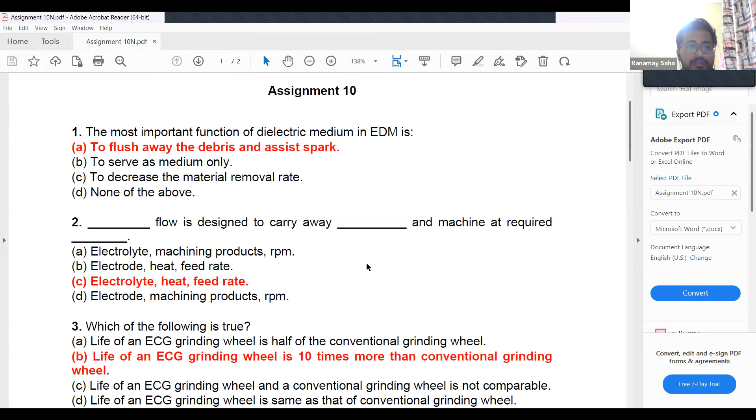Okay, so let's start with the assignment problems from last week, and then we'll continue to discuss some concepts and problems out of electrochemical machining process, which is your current week content. So starting with previous week assignment questions, you can see on the screen your previous week assignment questions. We'll first discuss these questions in some detail and get your doubts cleared if you have any. Then we'll look at concepts and problems from your current week content, that is electrochemical machining process. I hope all of you have gone through the videos of the current week, and if you have any doubts, you can shoot it anytime.

Starting with previous week assignment questions, the first question said: what is the most important function of a dielectric medium in EDM? We had discussed this in the last problem solving session. The most important function of dielectric medium is to flush away the debris, out of these four options. So taking away the debris has to be the most important function.

Then the next question said: dash flow is designed to carry away dash and machine at required dash. If you look at the options, take the first option - electrolyte is a fluid which flows, so electrode is not the one. So options B and D get cancelled instantaneously, and then you have option A and C.

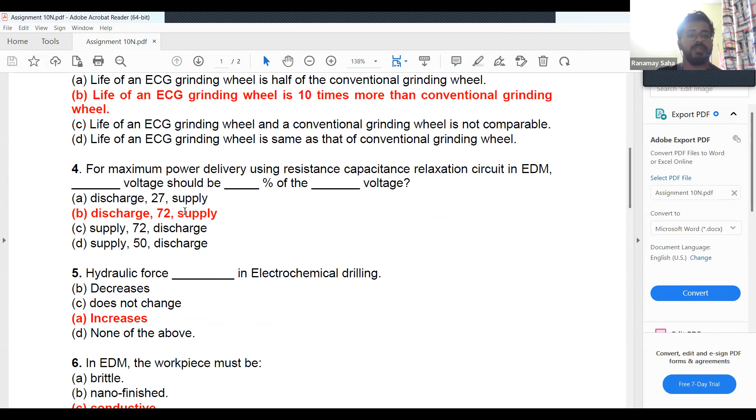Then it says that for maximum power delivery using resistance capacitance relaxation circuit in EDM - this was derived in detail, it's the discharge voltage. We had already discussed that in the previous session, and it is generally 72% of your applied voltage, or supply voltage. So option B has to be the correct one here.

And then you have hydraulic force in electrochemical drilling. With electrochemical drilling operation, in the course of the operation, hydraulic force generally increases.

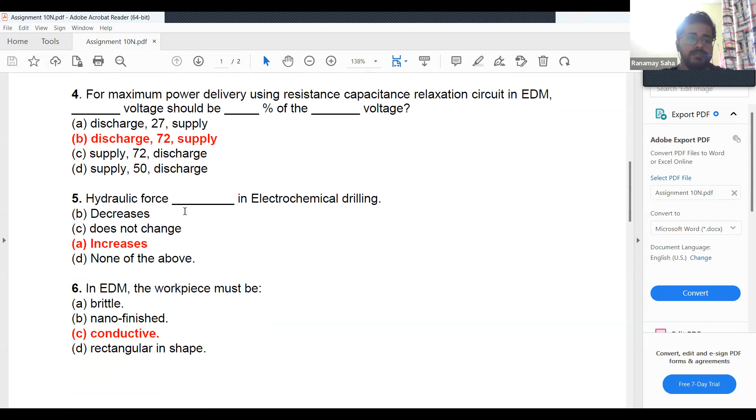Then, in EDM, the workpiece has to be conductive. Otherwise, how can electrodischarge machining take place? There will not be any flow of ions and electrons, and there will not be formation of an avalanche of ions. We discussed the basic principle of EDM last session at the very start. So the workpiece has to have conductivity for the EDM process to happen.

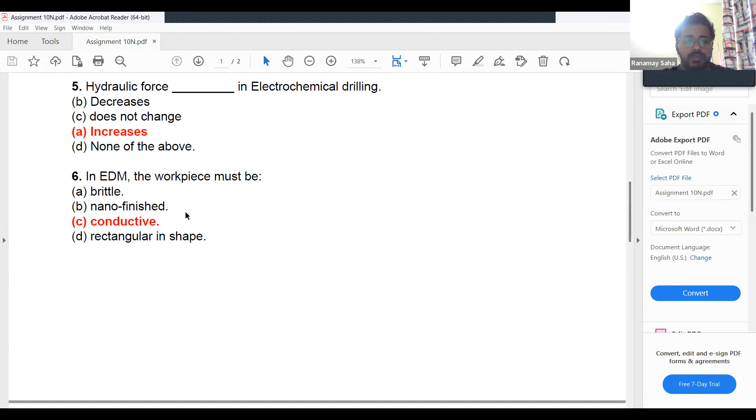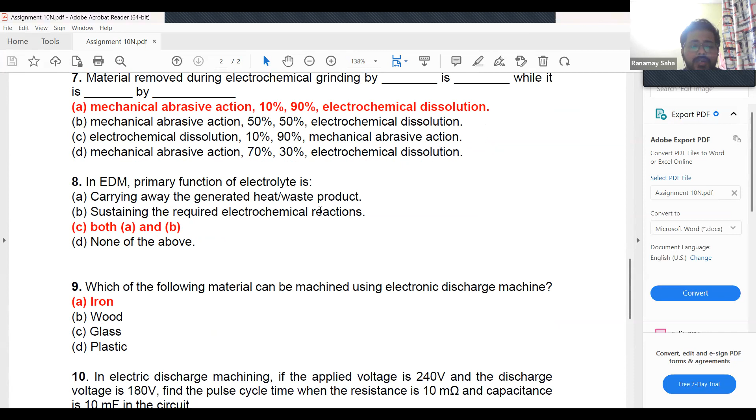Now, in EDM, the primary function of electrolyte - part of it was discussed in the first question. The primary functions are carrying over the heat or waste product, as already discussed above, and sustaining the required electrochemical reactions. Both are important, so options A and B have to be the correct ones only.

Then, which of the following materials can be machined using EDM? Of course, it should be a conductive material, and out of the four options, iron is the only one which fits the required answer. Now this is a numerical problem - a simple numerical problem. You have to find out the cycle time first.

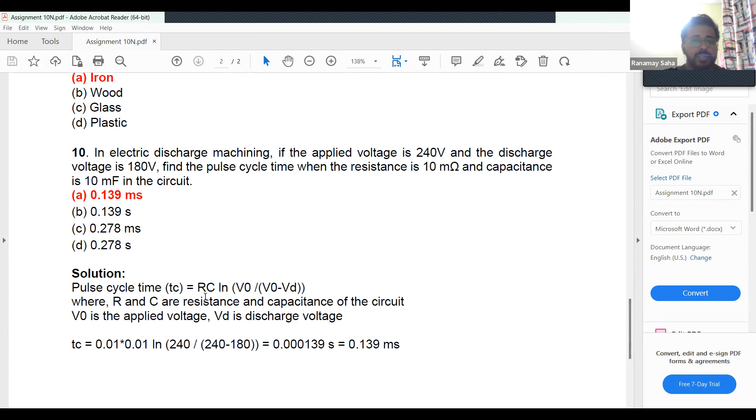The question says the applied voltage is 240 volts and the discharge voltage is 180 volts. You have to find the cycle time when resistance is 10 milliohms and capacitance is 10 millifarads in the circuit. Using the data, plug into the equation for cycle time derived earlier: RC natural log of supply voltage divided by the difference of supply voltage and discharge voltage. Plugging in the values gives a cycle time of 0.139 milliseconds.

This is a pretty simple problem. I hope you've been able to do all these questions, and if you have any doubts, kindly ask.

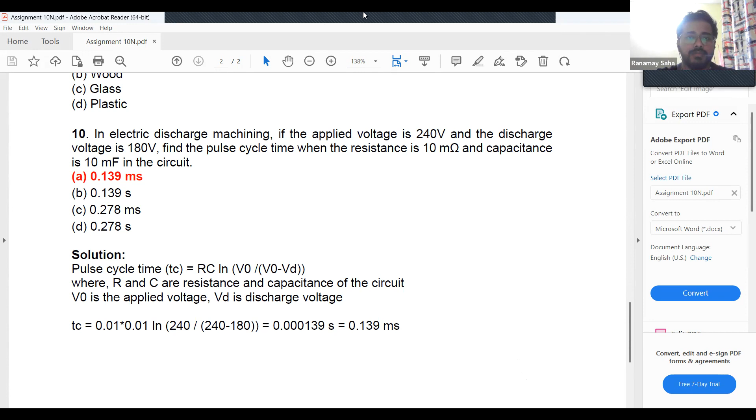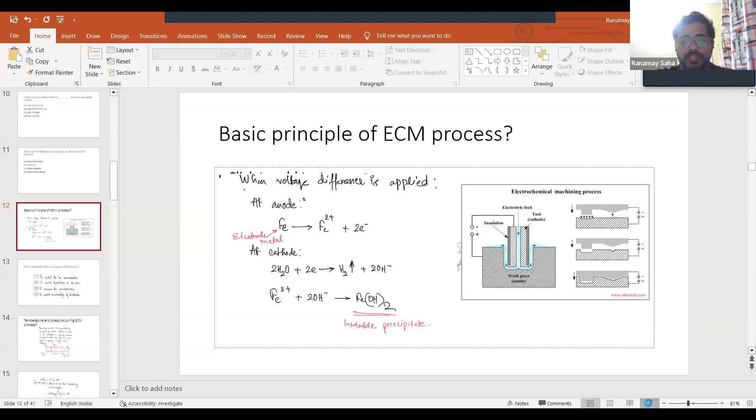We'll jump to the basic principle of the process. There is a cathode, an anode, and an electrolyte flow in between them. Generally, the tool is made the cathode, and the working material considered for machining is kept as the anode. Now, what's the basic logic behind this process? There should be machining of the workpiece, and the tool should remain intact. That is the ideal process definition.

For that to happen, when you apply a voltage difference, there are two reactions happening at the cathode and the anode. At the anode, the iron, which is the electrode material, loses two electrons and turns into a positive ion, Fe2 plus.

At the cathode, the water takes up these two electrons and evolves into hydrogen gas and two negatively charged hydroxyl ions. These hydroxyl ions start traveling towards the anode, and the positively charged ions start traveling towards the cathode.

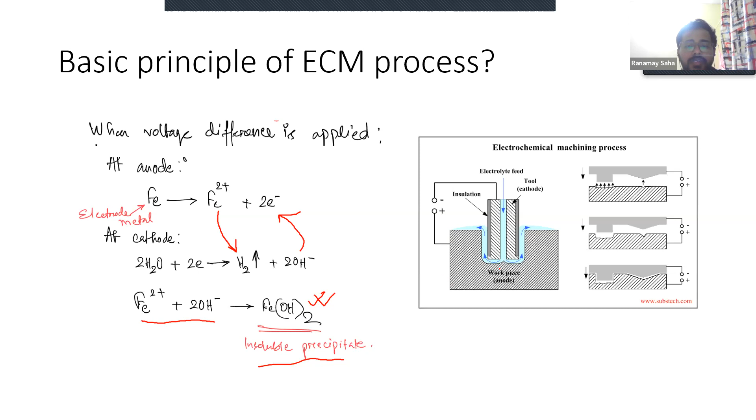Now the question arises: what happens to this insoluble precipitate? Should it remain there? What happens if it starts accumulating? Accumulation of precipitate should not be there, and that is one function of the flowing electrolyte. So why is electrolyte flow necessary in the ECM process? One reason is this precipitation, which must be removed away. That is one of the primary jobs of the electrolyte.

There are three other reasons: to avoid ionic concentration, because if ions keep concentrating at one point with lower concentration elsewhere, there will be differential material removal and a uniform shape of the machined material can't be achieved. So ionic concentration should be avoided, and electrolyte flow is necessary for that. Also, deposition on the tool should be avoided; all precipitate should go into the solution. Then there's overheating of the electrode.

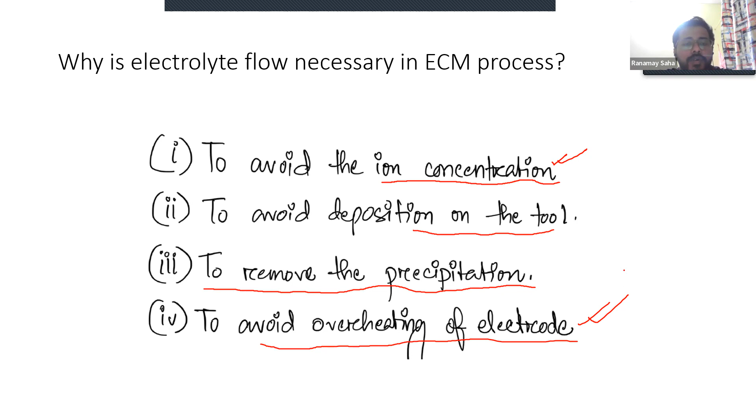We'll move to the next content, which relates directly to the earlier content: temperature and pressure during the process. What is the heat generation? How much heat is generated? How much is the rise in temperature during the ECM process? Let's assume all the heat generated by the flow of electric current remains in the electrolyte only, neglecting heat conduction through the electrodes for simplicity.

This figure shows the electrolyte flow. Suppose the electrolyte comes in from here, and we assume this type of path: the electrolyte comes in from here, moves out from here, and this is the equilibrium gap y. Current flow takes place from above.

Okay, here suppose is your tool, and below that happens to be your work. Now temperature initially let be theta naught, and finally temperature rises to become theta naught plus an incremental temperature rise, which is del theta at the outlet. Now we have considered this dx portion, and suppose this differential element is taken at a distance of x from the initial position. Now considering all these factors,

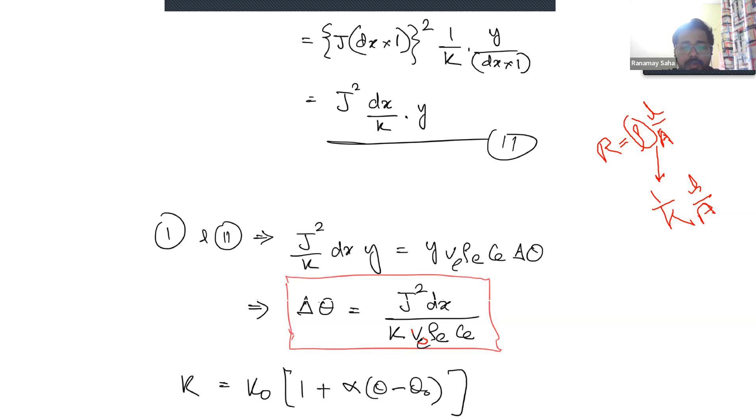So now you just equate the two heat equations: the total amount of heat carried away and the total amount of heat generated due to the applied potential, or the heat generation due to the resistor, which is I square R. So just equate these two to find out your del theta as J square dx divided by conductivity times velocity VE, your density of electrolyte material rho E, and your heat capacity CE. So this gives your temperature rise equation.

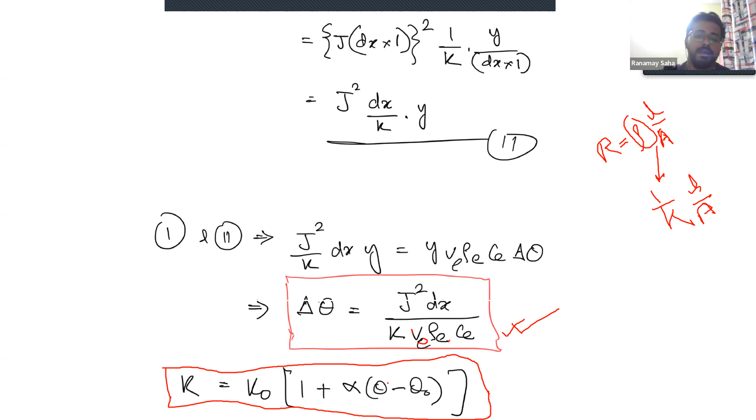Now obviously your conductivity is not independent of temperature variations, so conductivity should also vary in terms of the incremental rise in temperature. So the conductivity equation follows as K equals K naught multiplied by 1 plus alpha, which is the temperature coefficient of conductivity, times theta minus theta naught.

So given that, you just integrate both sides of this equation to find out your velocity of electrolyte flow, that is an important parameter to know. You just integrate, dx becomes your total length L, L being the total length of flow.

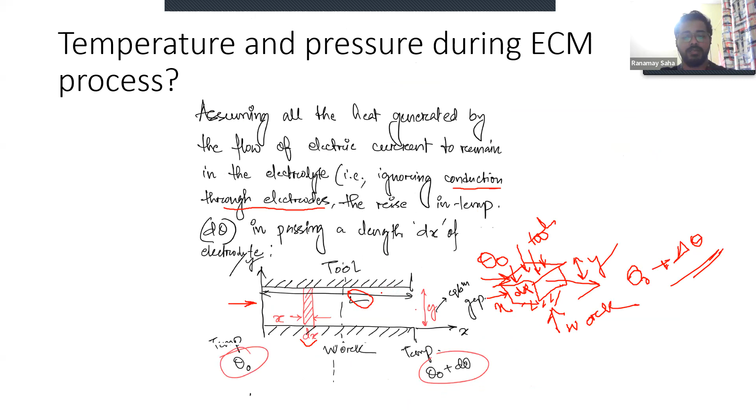And once you do that, you find out your velocity of the electrolyte flow as J square L divided by K naught into del theta plus alpha into del theta square by 2, multiplied by your density and heat capacity of the electrolyte. Now, another important parameter is the pressure required to maintain this velocity.

Now, assuming a turbulent flow, I will not go into the derivation of these. The pressure required happens to be this one. Now, here you have two parts: the first part belongs to the pressure required to overcome viscous friction between the plate and electrolyte.

This second portion, rho v square by 2, is the pressure required to overcome the inertia. However, this part is very less, because of the size effects and all. It's a minimal size, and the inertia values are quite low, and hence the pressure required is minimal in comparison to the pressure required to overcome the viscous friction between the plate and the electrolyte. So the first part plays the pivotal role in the total pressure required to maintain the required electrolyte velocity. I hope this part is clear to you all.

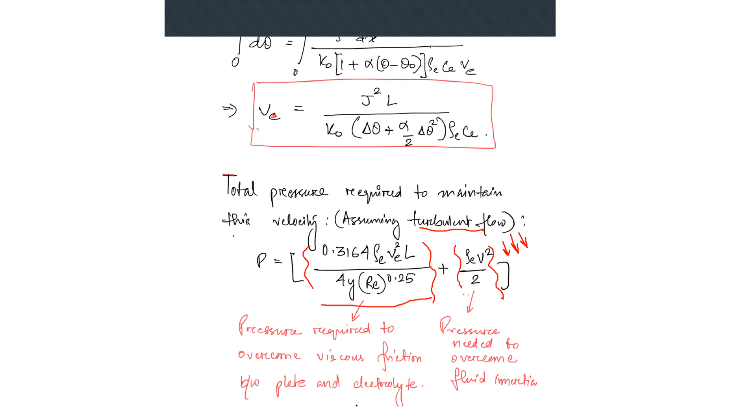So let's proceed to our next content. Here comes a numerical to solve, related to the current topic, which is your temperature rise and velocity of the electrolyte, and the pressure required to maintain that velocity. You just derived everything. Take note of those concepts and try to solve this problem.

I'll read out this problem for you. It says that in an ECM operation, a square-faced copper tool is used and brine is used as an electrolyte. Both are having a flat surface, and a feed rate of 2 millimeters per minute is used. The DC voltage used is 10 volts and the over voltage is 1.5 volts. The dimension of the tool face is 25.4 millimeter. It is a square tool, so the area is 25.4 cross 25.4, and the boiling temperature of the electrolyte is 95 degrees centigrade.

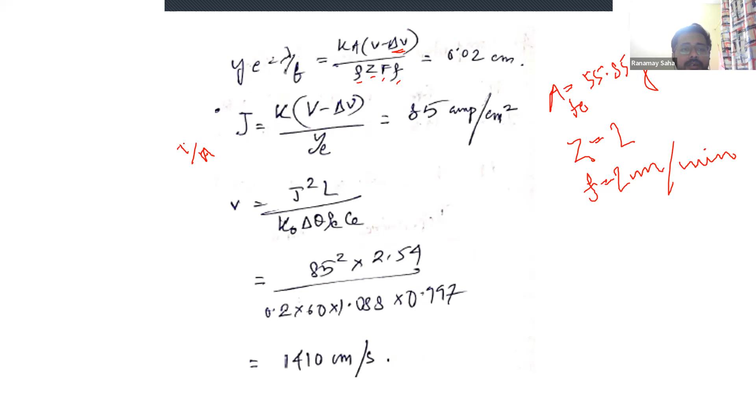Then J is your current density, which you find as current per unit area, which is conductivity multiplied by your voltage minus overvoltage divided by your equilibrium gap. J comes out to be 85 amps per centimeter square.

And then you find out your velocity, which we just derived earlier. It is J square L divided by your K naught del theta rho E, where rho is your density of electrolyte, and capacity is the heat storage capacity of your electrolyte. Just plug in the values and find out the velocity, approximately 1400 centimeter per second.

Now, once you have the velocity, you can go on to find the pressure required to maintain that velocity, using the formula we gave you earlier: 0.3164 density into velocity square into length divided by 4 of equilibrium gap. This is Reynolds number, characteristic Reynolds number for the particular material and flow, raised to the power 0.25.

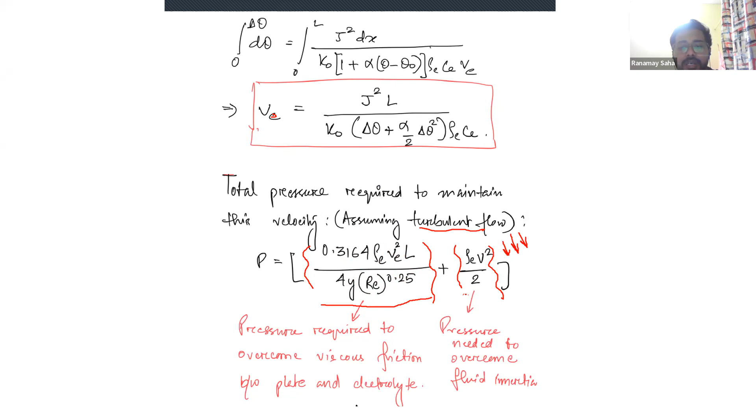And this you can neglect because of very minimal inertial effects. So just plug in the values, using the first term, you get almost equal to 238 kilonewton per meter square of pressure.

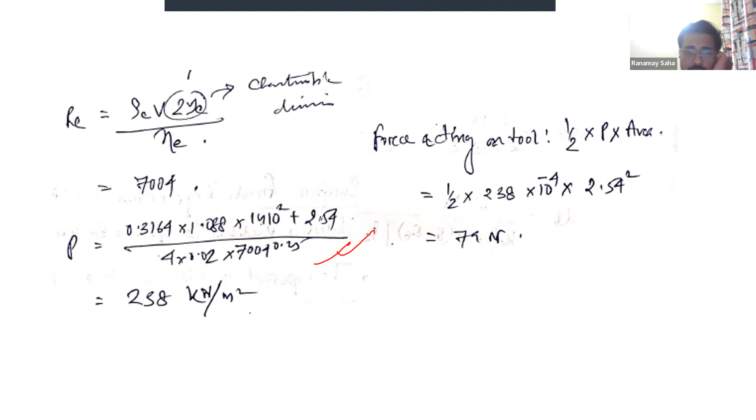And using this pressure value, just multiply with the exposed area, which is 2.54 cm square, to the tool. So just plug in the values to find almost equal to 79 Newton of force required to maintain the electrolyte at the required velocity.

So given that, this completes this problem. I hope it is clear to you all.

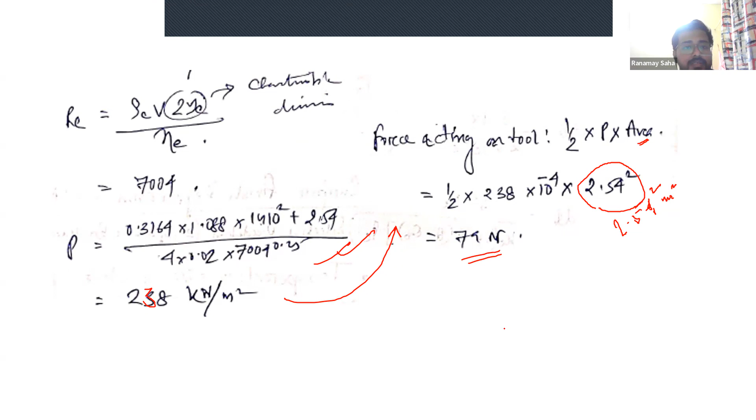That is with regard to some problems about your interelectrode gaps and the way equilibrium is attained between your work and tool during electrochemical machining process. These are pretty simple problems. However, before those, for the people among you who are not aware of these formulations, let us first take up one question regarding how do you come up to the equilibrium gap actually.

In terms of the question, in the electrochemical machining process, you use the fundamental Faraday's principles of electrolysis and show that after a particular time t, the interelectrode gap varies through a parabolic profile, assuming that no tool feed is given. Generally you don't give any feed to the tool, and an equilibrium gap is maintained.

So we have to start with current density, which we just discussed earlier. It is your current per unit area, J. Now, you know that current is voltage divided by your R, where V is your supplied voltage and del V is your overvoltage. So the net available voltage is V minus del V. You divide it by resistance R and take out 1 by A, area, as common.

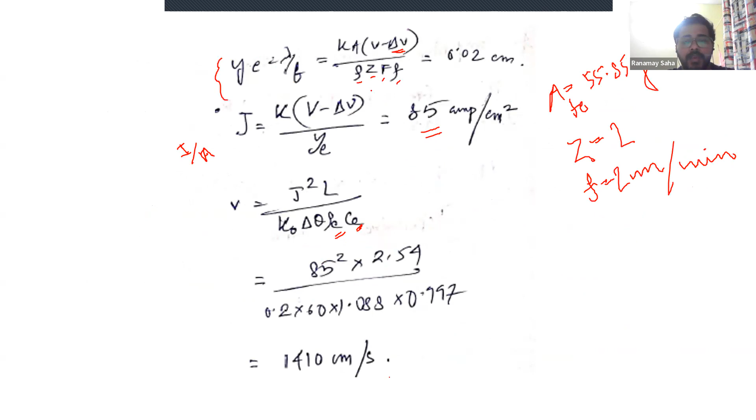It's a parabolic variation, and that is what has been asked in your question. So this case answers the question asked, and then this is another case when F can be constant. If F is constant, then lambda is also a constant term, and overall the rate of change of y with respect to time should become 0. So just equating that, you see that y equilibrium happens to be lambda by F. You know the value of lambda, so this was the value that was used here in the earlier question. I hope that clears your doubts if somebody was not aware of this formulation.

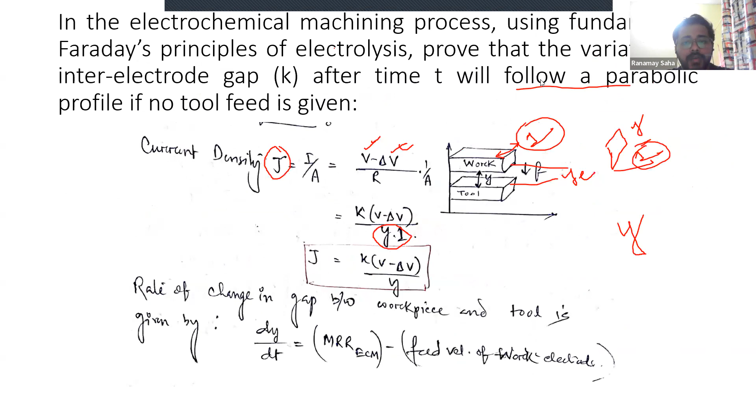Now given that, we'll move to two problems related to this topic. The first one is that in an ECM operation with flat surfaces, a 10-volt DC supply is being used, and the conductivity of the electrolyte is 0.1 per ohm centimeters, and a feed rate of 1 per minute is used. The workpiece is pure iron, and the values have been given for your reference. You just have to calculate the equilibrium gap.

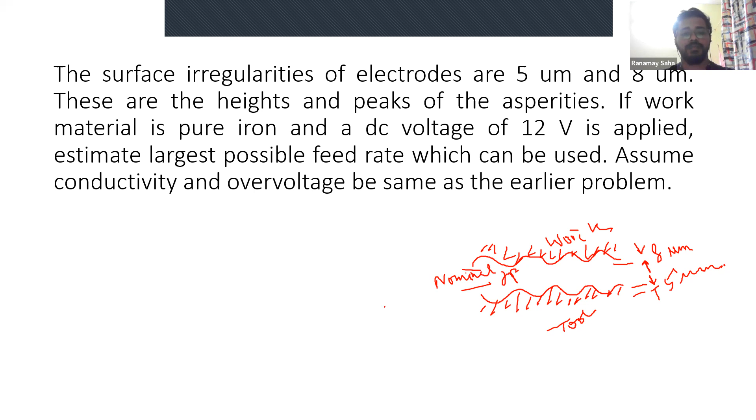Now 13 microns becomes your increased gap, and for that increased gap, what should be the largest possible feed rate? Just plug in the value of equilibrium gap as 13 here, and use this formula for equilibrium gap to find out the feed rate. And that answers your question.

Now that we have that, we'll proceed to actual theoretical tool geometry determination. I will take you through the 2D tool geometry determination, and you can also do that for a 3D tool. I'll just give the hints, and you can work out the 3D one yourself. If you face any doubts, you can discuss them in the next session. So this session will just take care of the 2D shape tool.

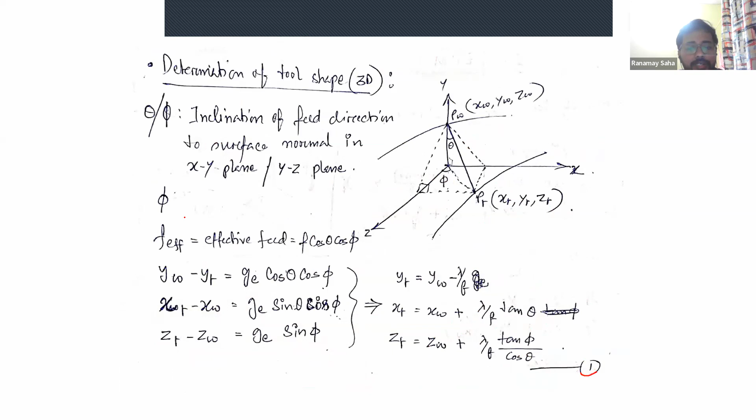So this is a way to derive the tool geometry when a particular work geometry is given, and this is a generalized expression in case of 2D geometries. We can also go to 3D geometries, and this slide gives you a hint about that. If you understand these things, then you can try deriving the geometry for the tool in 3D when your work geometry is given to you. If you find any doubts, you can take up the derivation in the next class. Till then, just try it at home. I hope there are no doubts regarding this derivation.

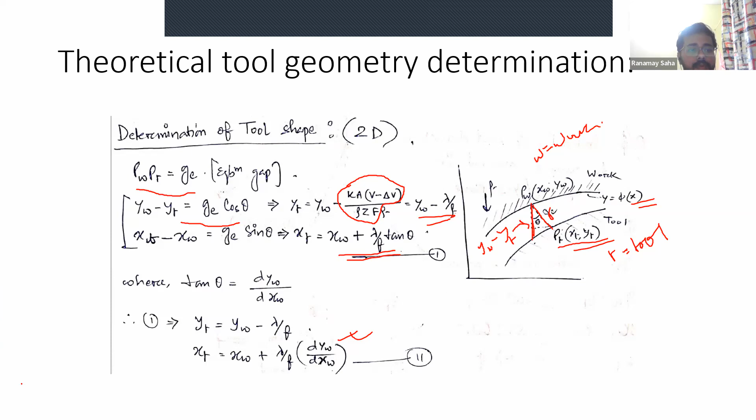Let's take up a problem regarding this current topic. We have to find out the tool surface geometry when the work geometry is given to you as 10 plus 0.3 of x minus 0.05 of x squared. Then you can use this data to find out the equation for tool surface geometry.

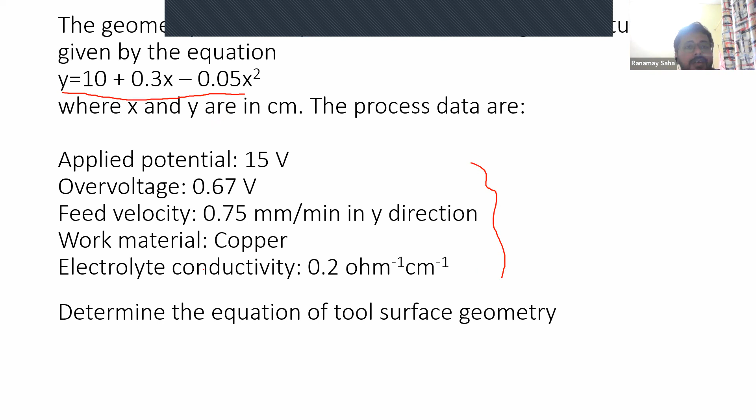So let's straightforward go to the solution. You have a workpiece geometry given as 10 plus 0.3 x minus 0.05 of x squared. The supplied voltage is 15 volts and the overvoltage is 0.67 volt, so the net voltage difference becomes 15 minus 0.67. Then your feed rate in mm per minute is given as 0.75, which you convert to centimeter per second to maintain unit uniformity throughout the problem.

You find that the lambda value comes out to 2.11 into 10 to the power minus 4 centimeter square per second. Now you find out the value of the ratio of lambda to feed rate and plug it into the tool geometry equation that we have derived earlier. You plug in, this is for work geometry, right? You have been given the work geometry equation, so this is xw and this you can take as yw. So you replace the xw's in terms of what we found earlier.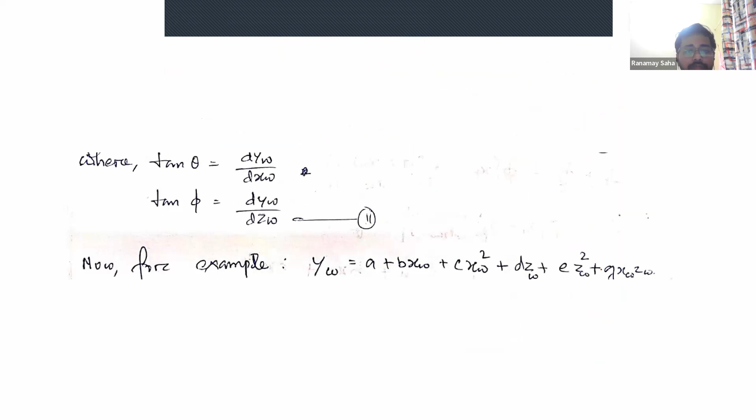This equation, okay, xt minus lambda by f of this. Just plug in these values here, and you can simply get the expression for your tool geometry y in terms of x. So this is how such type of problems needs to be solved.

And then this MRR concept in ECM process. So these are simple demonstrations of how you get down to the expression for your total net material flow rate, material removal rate in ECM.

Just take note of this gram equivalent weight of metal. A is your atomic weight. When you divide that by the valence Z, that is called as your gram equivalent weight of the metal. You are acquainted with Faraday's law, which says the mass flow is actually proportional to the current and the time for which the current is supplied, and the gram equivalent weight A by Z of the metal, and then your F, which is Faraday's constant.

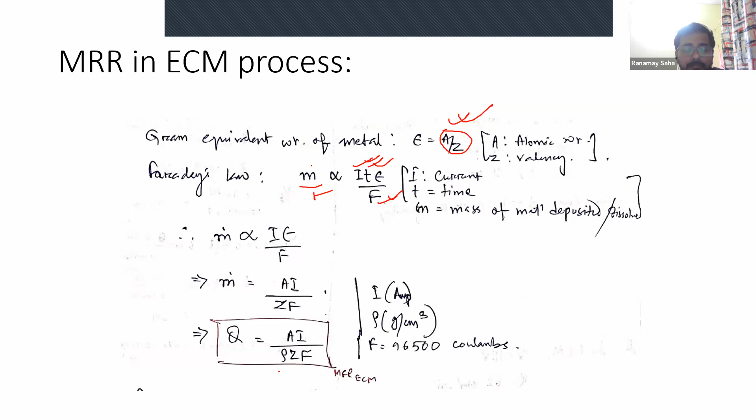Now you plug in the values, and you find that you take the time to the left, and the mass flow rate becomes I into epsilon by F, where F is Faraday's constant, which is 96500 coulombs. And then if you know the mass flow rate, you just have to divide it by the density to find the MRR, volume flow rate. So even for an alloy structure, you can find out the total flow MRR. You just have to find out the equivalent density given by this equation and plug in the value, using equivalent density in case of density.

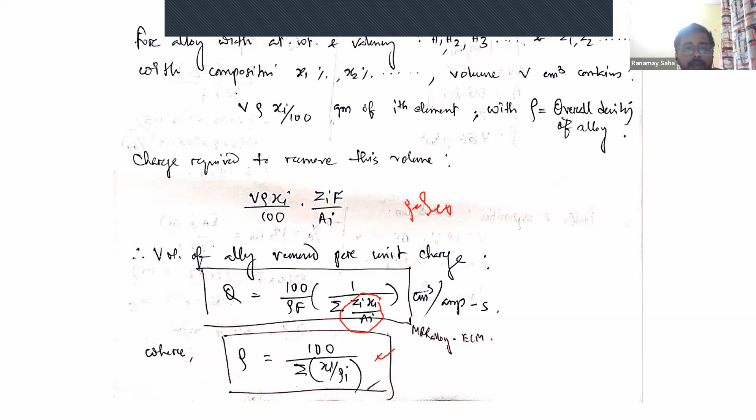Also plug in the values and take the equivalent weight, so that way you can find out the total MRR for alloy materials also. Now, using this concept, let me take you through a problem corresponding to the MRR in case of ECM processes.

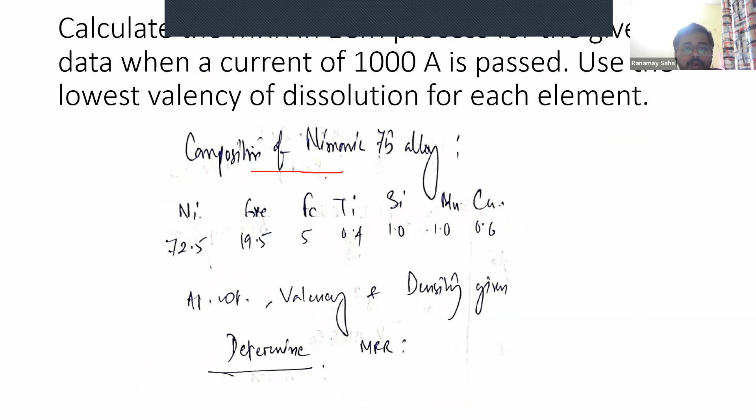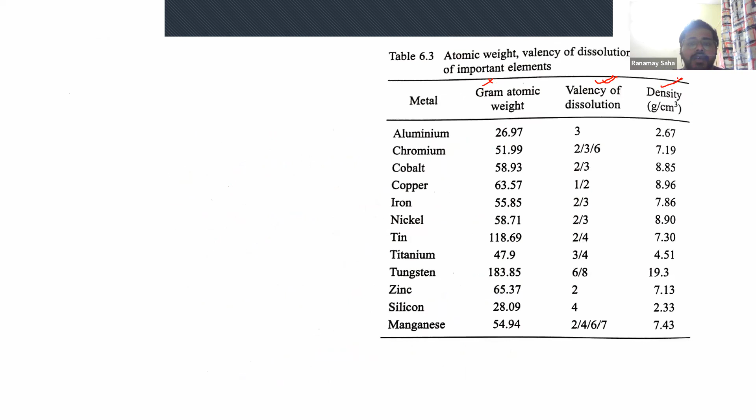Suppose you have been given a Nimonic alloy of which these are your components, with the maximum of nickel. For Nimonic alloys, we have a highest percentage of nickel with other substitutes or components in minor amounts. So you have been given this table, which has the gram atomic weight for all the components, the valency of dissolution, and the densities. You take care of these values and find out the net or overall density of the alloy.

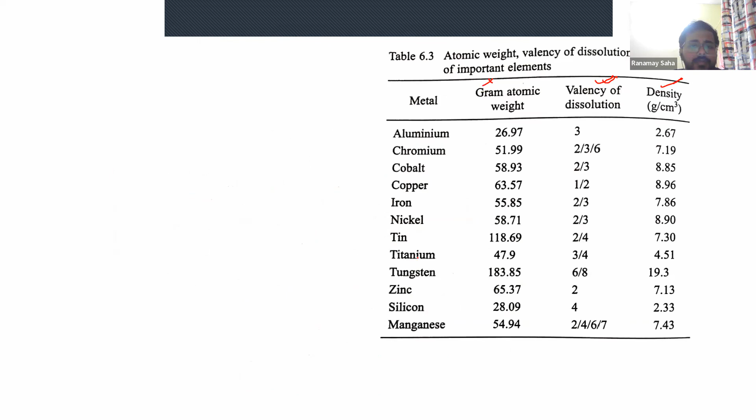And the overall gram equivalent weight, and just plug into the equation for MRR to get the desired answer. So you can see that the overall density can be found out in this way.

Xi is just an enumeration variable. It takes you through all the components of the particular alloy. In this case, whatever you are having as nickel, Cr, Fe, titanium, silicon, manganese, copper, whatever you are given, you just take the values from this table, the fraction of the corresponding components and the density of the corresponding components from here, and take out the equivalent density of it.

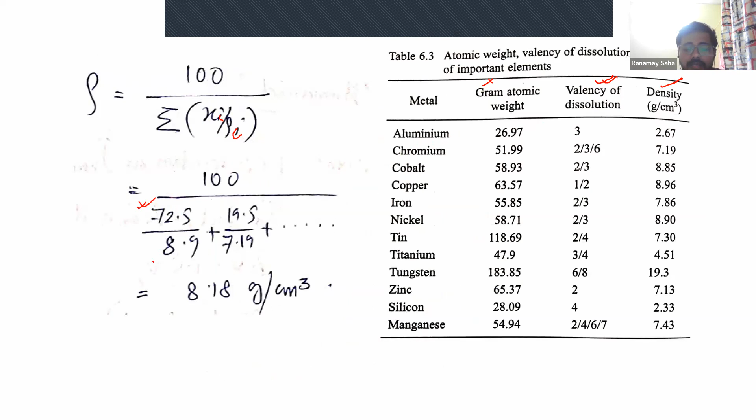Once you find this, you just plug in here where Zi stands for the individual valencies, Xi for the individual fractions, and Ai for the individual atomic weights. You plug in these values here and find the total summation of that, and you can find the MRR as 0.35 into 10 to the power minus 4 centimeter cube per second amperes.

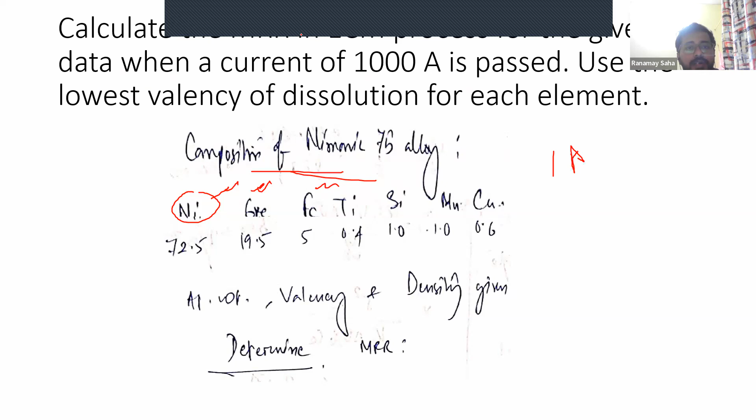Now, from the derivation earlier, you have seen that Q is per unit area, and it is for one unit of electric current. Here you have been asked to find out the data for a total current of 1000 amperes. So you just multiply the net MRR with the given amperes, and you can find it in terms of seconds, and multiply it with 60 to find out in terms of minutes, the centimeter cube per minute.

So this type of problem was also solved in class and is very probable in exams. I hope you have a clear concept of these problems. The only difference in case of alloy is you have to find out the equivalent densities and the equivalent gram atomic weights.

So if that is clear, then we'll move to the last topic of today's session, which relates to the factors that affect the surface finish in the ECM process. There are multiple reasons, out of which 4 particular factors are the more influential ones, and we'll start with selective dissolution. Now, what does that mean?

Actually the surface of the particular work material you are using in case of alloys need not be a super finished surface, and there can be several constituents. Suppose you are using an alloy material and you have several constituents on that. Now the different constituents can have different electrode potentials also, and depending upon that, suppose A is one component, one constituent of the alloy, and B is another constituent.

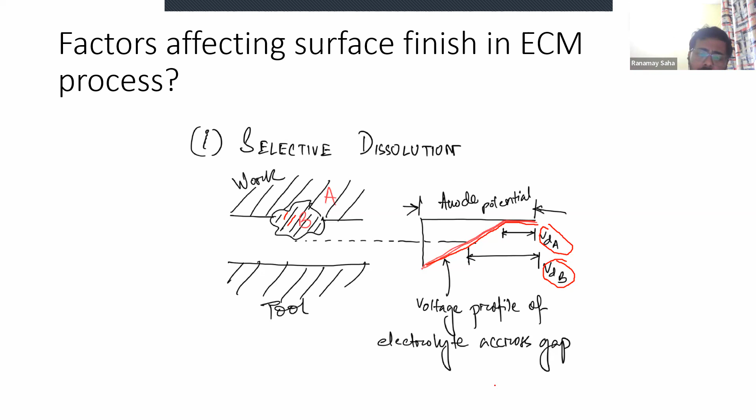So this way in steady state the work surface becomes uneven, and the smoothness happens to get lost. So this is one factor which affects the surface finish in the ECM process. If you got it, then we move to the second important reason, which is called the sporadic breakdown of the anodic film.

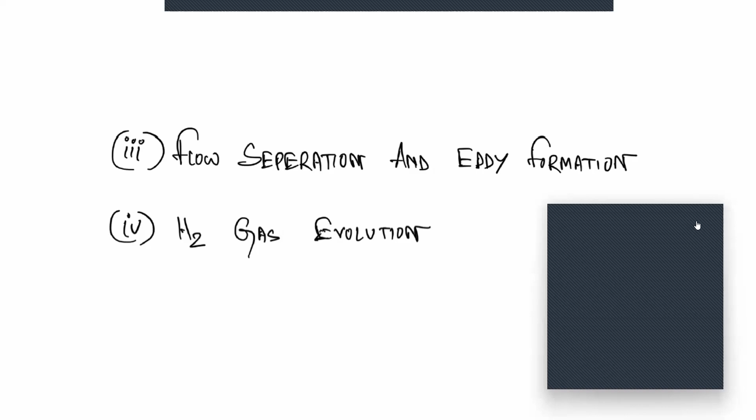So one question was why AC potential is not used, and we said this may lead to cyclic deterioration of the tool also. Now, another question is whether this is not desirable for an alloy material. Whatever material you use is not going to change the potential you are using. What material you use is completely independent of what potential you use. Whatever potential you use, continuously the positive and negative electrodes are going to change in a cyclic pattern. So whether an alloy or a pure metal is used doesn't really matter, it will obviously get deteriorated. I hope that clears the question.